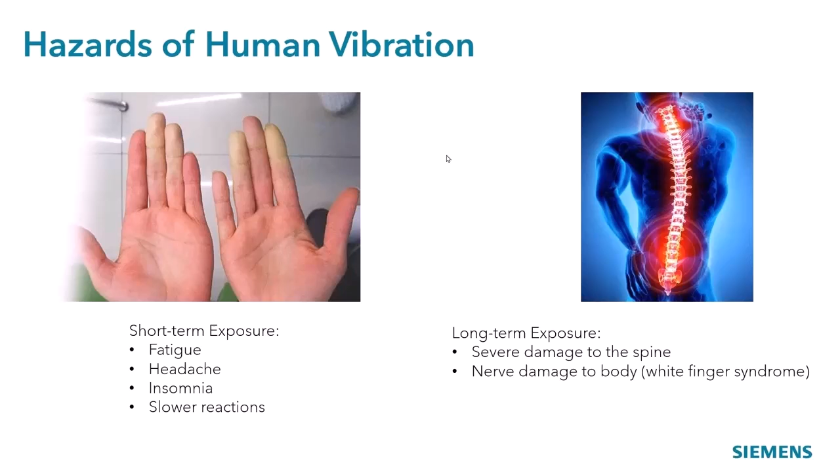So there's two types of human vibration. There's whole body vibration, which I feel like is kind of self-explanatory. It's the vibration that's being imposed on your entire body. And there's a couple orientations that really matter, because the body is sensitive in some directions more so than others. So in the Z direction, the up and down position, the body's actually slightly less sensitive than it is in the X and Y. The X and Y matters a lot more on the person. Later on in the presentation, you'll see that there are more health factors associated with the X and Y directions for whole body vibration.

Strangely enough, the European Union decided that there is not an orientation for the hand and arm that is more important than others, so these are all weighted equally. But it's really important to measure in all three directions because it absolutely can affect you, and it does matter. And we usually look at the summation of all the directions anyways.

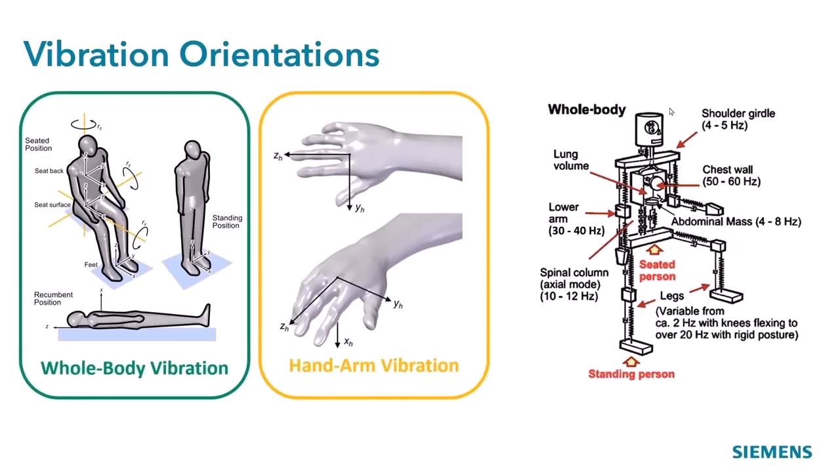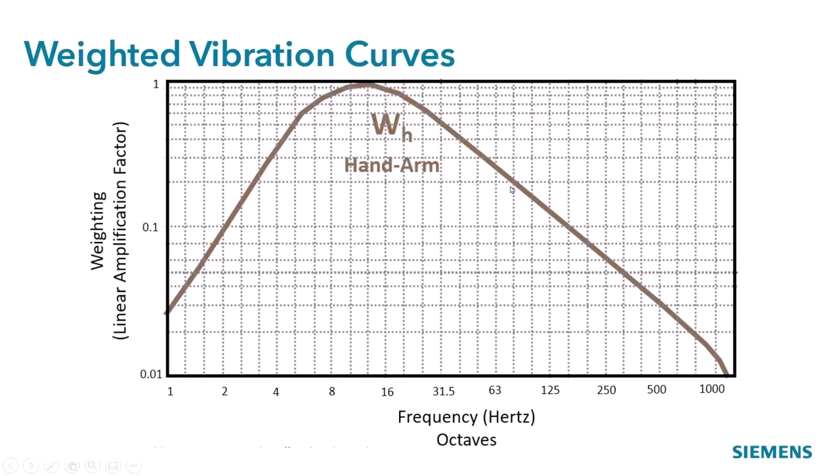So this is what the hand-arm weighting curve looks like. So it's a little different. So there's a bunch of different curves, and luckily nobody needs to memorize these. These are all built into TestLab if you're doing this in TestLab. So that's really nice. But it's important to select the right curve because you will get different results. They are different curves. How they came up with these curves, I'm not entirely sure. I think it was trial and error data because this occurred a long time ago. But make sure you're selecting the correct curve.

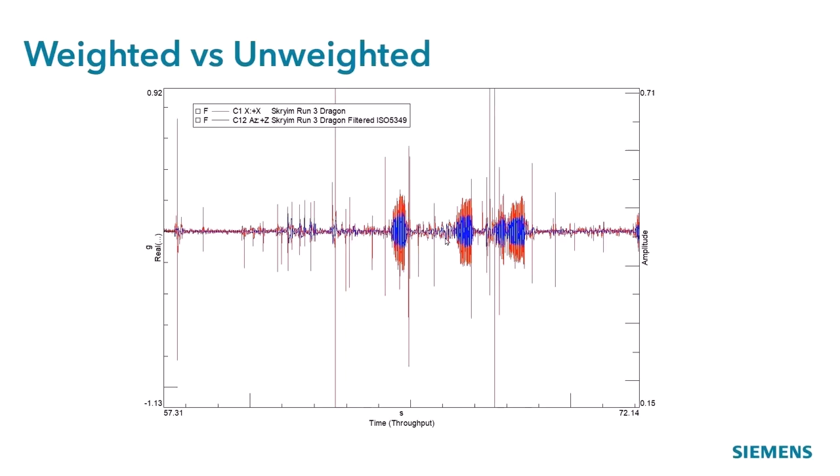The general data when you take it, so I have some data here. I was playing a very popular video game, and I got into a battle with a dragon, and the controller starts shaking a lot. So the red will show the unfiltered data, and then the blue shows the filtered data. So I filtered this using TestLab through the human body vibration filter for hand-arm. And you can see that the amplitude has decreased before the calculations are performed. That's because, once again, the human body will attenuate a lot of that vibration.

The general process for doing vibration data is you have an accelerometer. You usually want to put it somewhere near the test article that you're interested in. So when I did hand-arm vibration on the tool, I would put the accelerometer right where the hand would grip, so we could get an accurate measurement of that. If you're doing whole body vibration, there's special pads where you can put these accelerometers in so that somebody can sit on them. They're like seat pads, if you've ever heard of those.

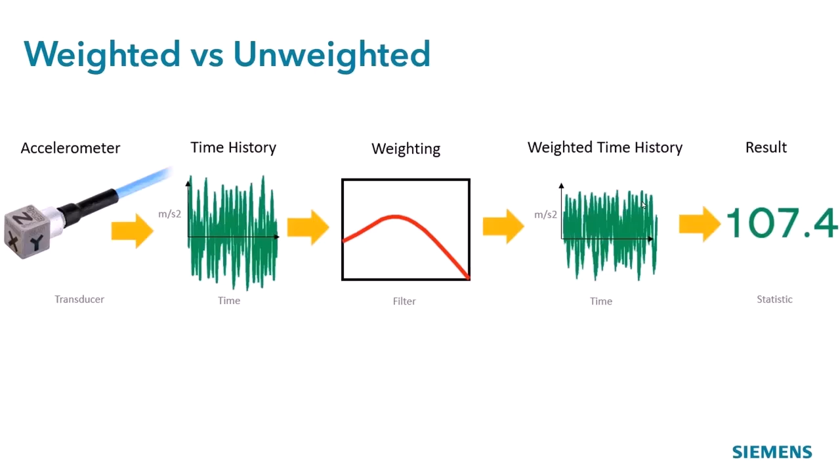So you get an accelerometer, you take a time history, then you weight it with those curves we just showed, and then you get a weighted time history. And then from the weighted time history, there's a ton of different things you can do and a ton of different metrics, and we will get to that. The most basic metric is what we call AW. That's your frequency weighted acceleration. So this is the acceleration data that's been passed through your weighted curves. And you can kind of think of it like an RMS value. That's typically what we look at when we're looking at human vibration. We're trying to get a total value to compare it to something else, usually a singular value.

So if you wanted to get it in all three directions, you could calculate AV, V standing for vector, very scientific, and it's just the square root of the sum of the squares. If you're wondering what these Ks are, that's because earlier I mentioned some directions have different weighting factors than others, because some are more sensitive to the human body. So for whole body vibration, the X and Y direction actually get a factor of 1.4. The Z direction just gets a 1 factor. So it's important when you're calculating these frequency weighted acceleration values, if you want a total, and you're going to see this in TestLab too, this vector sum, we're going to use this a lot to calculate the overall level. This is how you calculate it for all three directions.

There's something called the maximum transient vibration value. This is the maximum value of all three directions of your AW. So you've got an X, Y, and Z direction, and this is the maximum value of that. It's very easy to calculate. And if you're wondering why we calculate AW and MTVV, and there's something called vibration dose value, the reason is AW is really good for stationary, steady state style data. This is data where you're not getting a lot of sudden impulses and peakiness. And if you do start to get impulses and transients and peaks, there's a different metric to use for that.

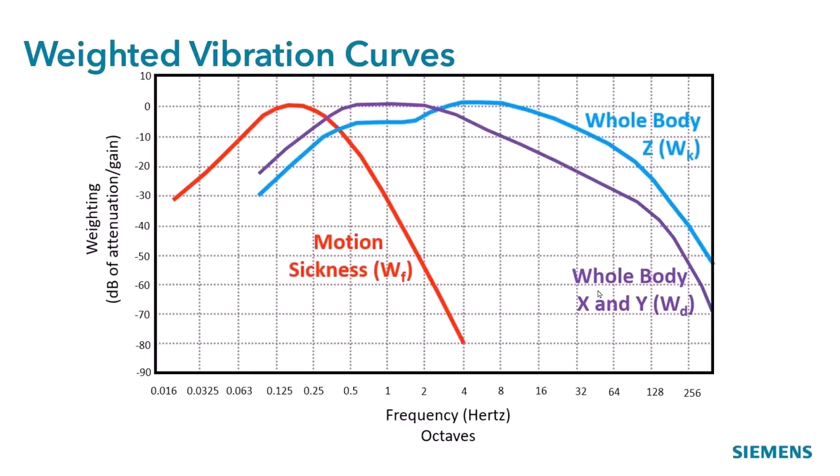Okay, for whole body, you saw that there was a WK, let me go back a little bit. There's a WK and a WD. WK is whole body vibration in the Z direction, and WD is whole body vibration in the X and the Y direction. So there's reasons why we measure them separately. It's mostly because they have differing effects.

For hand-arm, we have something called AH. You might see it as AHV. AHV is the summation in all three directions. This is that curve WH, AH. There's another slide with all the jargon in case you forget. These ones don't have a special call-out between the directions because these are all weighted the same.

There's something called AH equivalent 8, or the 8-hour exposure limit. So this is if you're trying to see if something's safe for somebody to use for an 8-hour workday. So like, let's say you're a tool company and you want to make sure that your jackhammer is safe for somebody to be using for 8 hours a day.

You can type in your acceleration values that you measured over the time that you measured it, and then divide by the amount of seconds in 8 hours, which comes out to roughly like 29,000. So that's one way you can calculate your exposure limit. There are comparative values for what is safe and what is not safe to find in these ISO standards.

Up next is something called crest factor. Crest factor really just tells you the peakiness of your data. It does that by dividing the peak amplitude over the RMS value, specifically the weighted peak amplitude, and I'll show you how you can make that mistake really easily later when we're going through TestLab. But if you don't use the weighted peak amplitude, the comparison number isn't going to make a whole lot of sense.

So the crest factor is a really good way to tell if you're getting a lot of transients in your data. If you're getting a lot of transients in your data, you might want to use this vibration dose value. This vibration dose value is separate from this frequency weighted acceleration. These two values are typically what you want to report, and this is specifically designed for data that is more transient. The equation's a little different mathematically, and it's for a good reason.

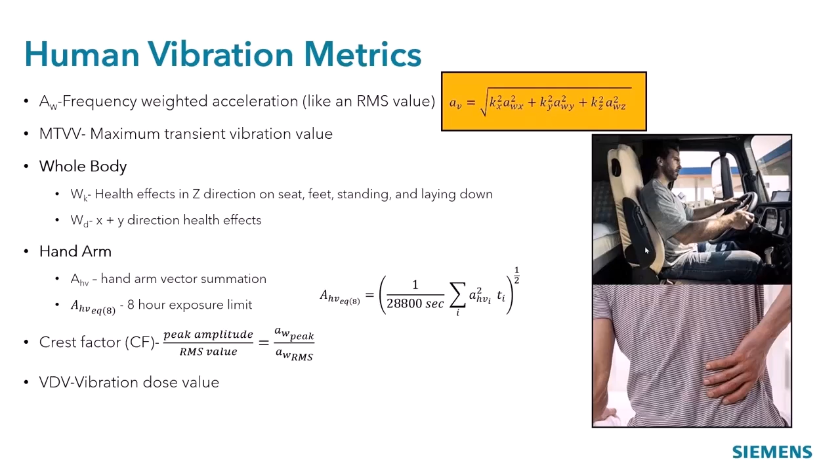So that vibration dose value, once again, this is used if you're doing very impulsive transient data. This is calculated a little differently than the other equations because it's brought to the fourth power. And the reason it's brought to the fourth power is because the fourth power is more sensitive mathematically to spikes in your data. So to amplify those spikes in the data, to make sure that we're staying below important limits while reflecting the important transients in data, you can use this vibration dose value.

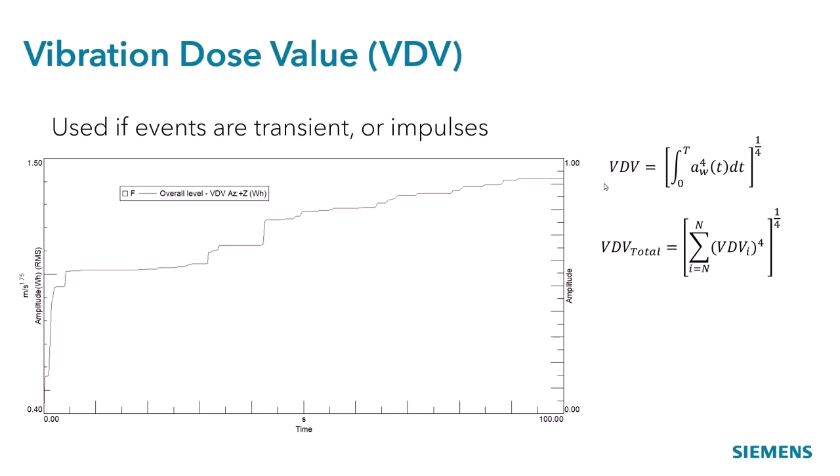It just amplifies it to the fourth power, and then we take the quartic root of that data to get it back to normal. So there's two different ways to calculate it here. These equations are for reference. TestLab calculates these for you. You don't need to worry about it. You can do a total summation in all directions, but typically people will report the VDV of the highest direction.

We talked about when to use different metrics. If your MTVV, that's that transient method, the maximum of your A-weighted acceleration, if that value is greater than 1.5, you're going to want to report this value. Your data is too peaky to be using this stationary RMS value. If your data is 1.75 times the A-weighted times your time, you're going to want to report this VDV total value. That crest factor is also used as a measure of peakiness. You can use that too.

So if your crest factor is less than 9, you can use AW. And if it's greater than 9, you're going to want to use that vibration dose value. So this is a measure of peakiness. If it's below that, you can use basically your stationary. If it's above that, you're going to want to use that metric that's more sensitive to those transient impulses.

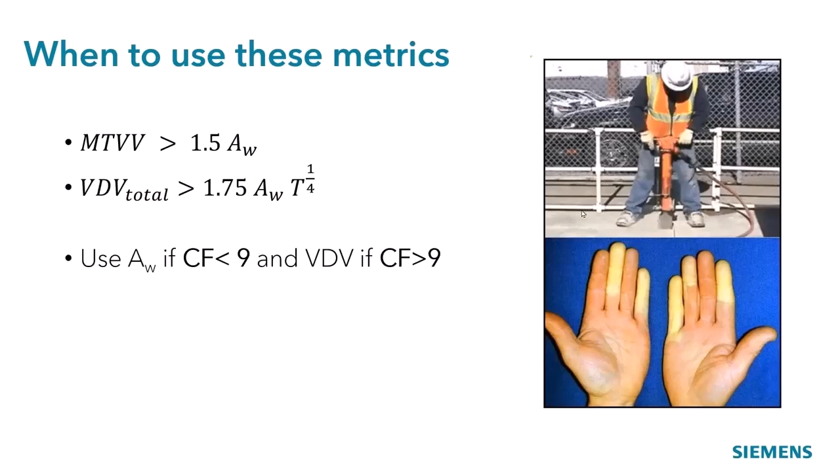So WK, WD, there's a bunch of them we didn't even talk about. WJ, which has to do with your head position. WC, which has to do with your back position. But mostly for this presentation, we're going to be focusing on WH, that hand-arm.

So there's two standards that are used. It's important to remember these just because when you're in TestLab, you will have the option of picking either one to filter to. And if you filter the wrong one, as we showed earlier, those curves are different, you will get the wrong answer. So there's ISO 2631. This is the one for human vibration. Once again, WK and WD.

I mentioned that we're trying to get singular values because we want something to compare to. So when the EU made these standards, they have some take action limits and some immediately stop limits. So for whole body vibration, if you take the vector sum of your A-weighted data, if you report the VDV value or the AW value, if it's above 0.5 meters per second squared, you need to reduce the vibration. Or if it's above 1.15 meters per second squared, you should stop.

For vibration dose values, this is closer to 9.1 meters per second to the 1.75 power and 21 meters per second to the 1.75 power. If you're doing hand-arm, your reduced vibration action is 2.5 meters per second squared. And that's actually pretty low. So most of the power tools that are designed for people who work in the industry, most of the time the handle is actually decoupled from the rotating mechanism in an attempt to reduce the vibration. The stop action exposure limit for this is 5 meters per second squared.

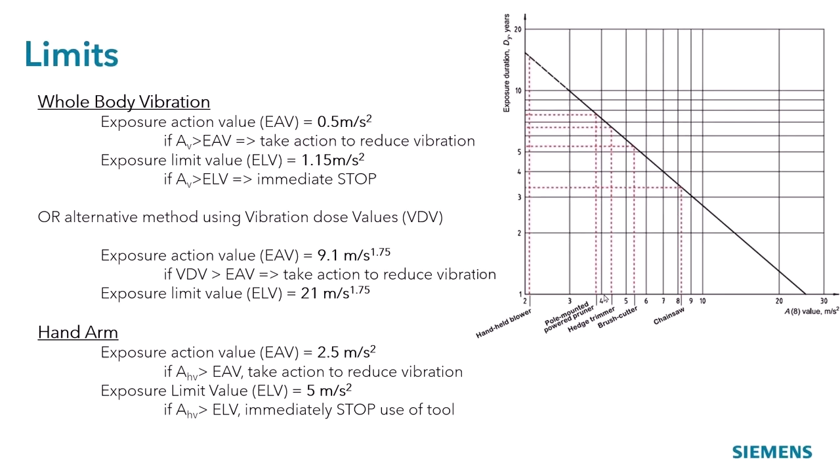So for whole body vibration, the general process is to measure the data, and then in TestLab, these two steps are done together where it filters it into octave bands and then it weights those octave bands because there's specific weighting criteria for each frequency. And then you'll have it in 3 directions. You'll have your A-weighted in X, your A-weighted in Y, and your A-weighted in Z.

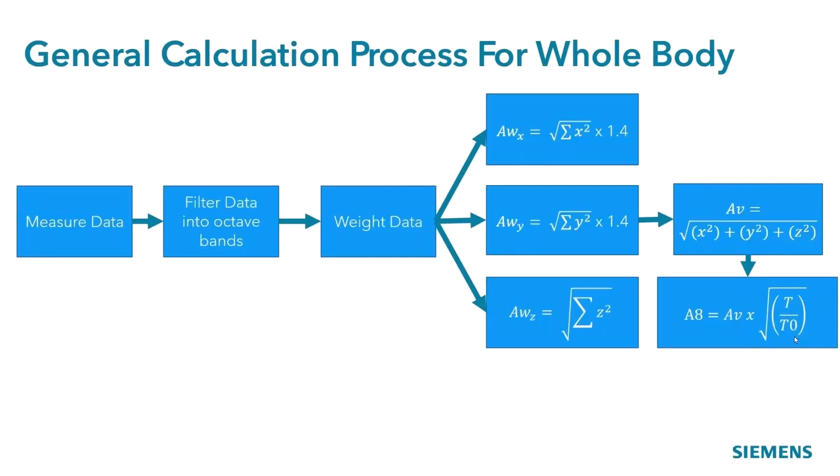You can do the sum of the squares. This 1.4 is that health factor that gets multiplied. And then you can get a total vector, this AV vector. If you want to do an 8-hour exposure, you can apply the AV vector and multiply it by your T, which is the time you took the data for, over T naught, which is the seconds in an 8-hour day.

For hand-arm, the process looks very similar. We're going to weight the data. The data will come out in 3 directions, and then we're going to do a vector sum to get the overall level. And this overall level is what we're going to be able to use to compare back to those EU standards.

The math behind most of what we're doing is actually really, really simple. It's the weighting and the filtering that gets more complicated. But luckily, I will not be weighting and filtering by hand today. I don't know anybody who likes to program Butterworth filters by hand, but that's not me. So we'll be doing that in TestLab.

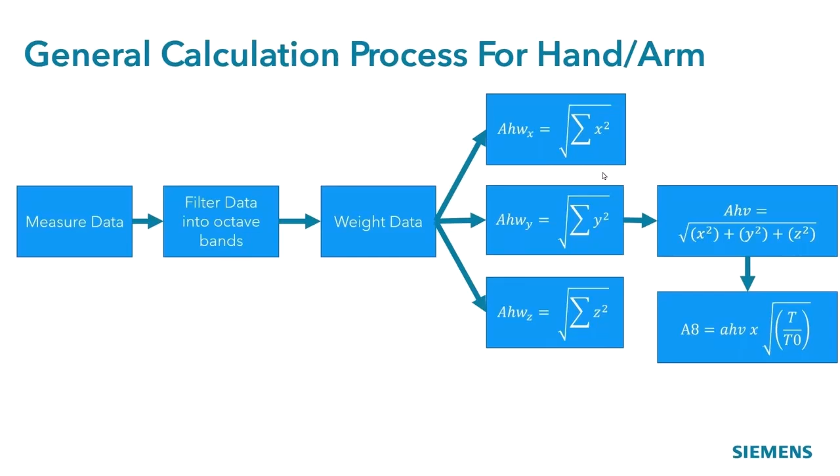So for my data, my setup was very simple. I had a little SCADAS XS. I did this data at home. I connected my accelerometer. It's in a very specific position. This position is because when you're playing video games, if you've never played video games before, there's these little rumble motors inside the controller.

They give haptic feedback. So I battled in this video game 2 different bosses. I battled a troll and a dragon, and as I'm battling this troll and dragon, this controller is starting to shake and go crazy to let me know that the dragon has landed, or I've landed a hit, or I'm being hurt.

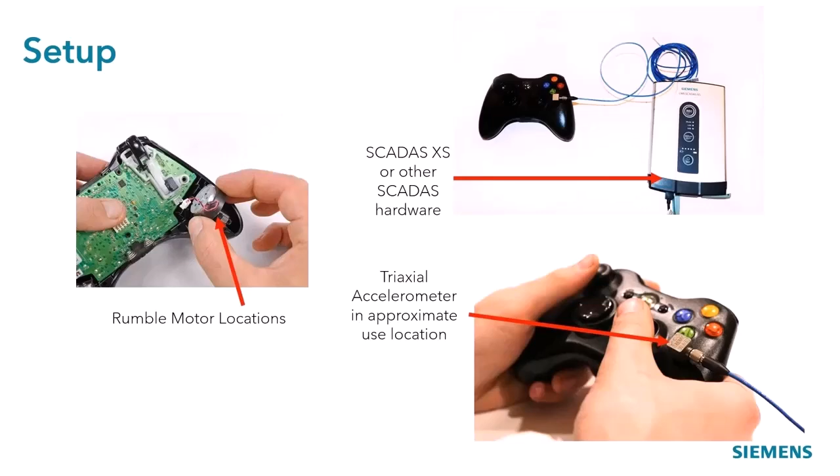So in video games, this can be pretty useful to players. And I just wanted to see exactly what the acceleration values were if I was playing this 8 hours a day. So here's my 2 battles, and I'll show you the data too so that you guys get an idea. I've got a troll battle and I've got a dragon battle.

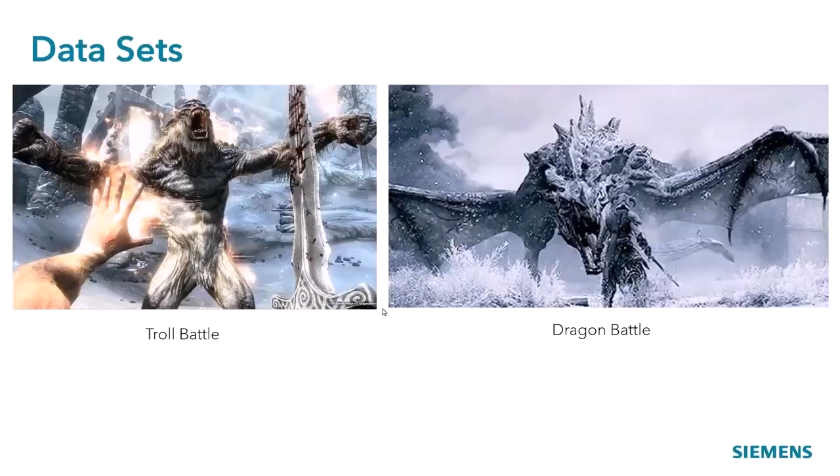And if you know the popular video game, that's great. It's a fun one. And they're also taken at different lengths: this data is taken for 30 seconds, and this data is taken for about 100 seconds, because that's about how long I lasted in each battle. So now I'm going to pop it over to Test Lab.

Okay, so I've gotten some measured data in Test Lab. This is the throughput data in the X, Y, and Z direction. So I can zoom in a little bit. All I've done here is plot my data, just so you guys can see that at some points I'm hitting a troll, or at some points I'm getting hit by a troll, and then my dragon data.

And unfiltered, the accelerometer registered up to 31 meters per second squared. So this controller was shaking quite a bit during this battle for sure. The trolls actually only got up to a maximum of about 15 meters per second squared in any given direction. So that's what my data looks like.

I'm going to post-process. We'll do post-processing 1. I'm going to post-process this Skyrim Dragon 3. So what I'm going to do is right-click and hit Add to the Input Basket. If you're new to Test Lab and you don't know what the Input Basket is, that's this thing right here. It's a little folder that lets you separate out all your data.

So I had a bunch of data in my measured, but I only want to process the Dragon data, so I'm going to add that to the Input Basket. I'm going to go to Time Data Selection. I've already got these typed in here, but I'll re-type them in just so that people can get an idea. I'm going to add in my data. I've got my X, Y, and Z channels.

Then the most important thing you need to do is you need to have the correct add-ins on. So for this one, at minimum, you will need human body vibration. If you do not have this turned on, those filters will not pop up in Test Lab, and you will be very confused wondering where the equation went. So this is important to turn on.

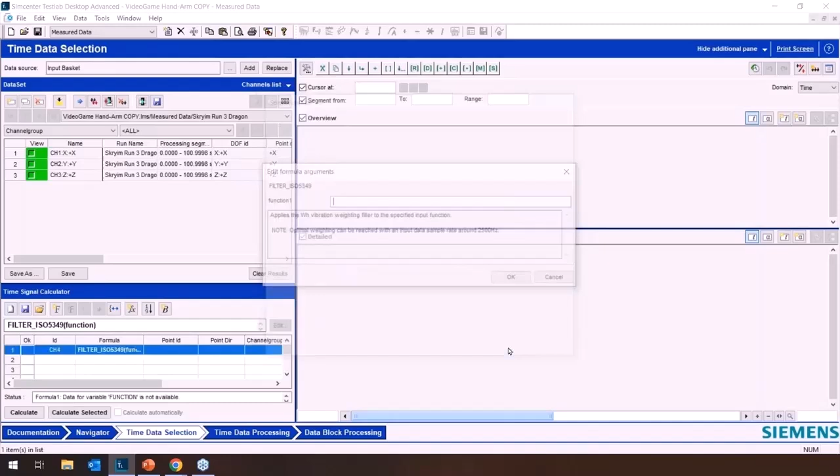My first channel, channel 1. And then I want to apply this to all 3 channels. You can hand type it in, or, if I'm careful about it, you can drag it down. Sometimes it doesn't like to work for me. There we go. So now it's applying to channels 1, 2, and 3. So my X channel is channel 1. I'll call this A hand X, A hand Y, A hand Z.

And now I can calculate it. So I've got my 3 calculated areas, and this is good. We're pretty much halfway there. There's something really cool you can do right now too. If you want to calculate that MTVV and those crest factors, you don't have to go back to the navigator. You can calculate them right here to see what your next step needs to be. If you go over here to this hide additional pane and go to single value statistics, it'll pull this screen right here.

Now I can add some functions. So I want to add in the max, because that's that MTVV value, and I want to add in crest factor. If I hit calculate, I now have them for all the channels. So remember earlier I said if you're using the unweighted, your crest factor is going to be really, really high. This is 63, that's way above 9, and that's not accurate. This isn't what our standards are built to.

So if you look at your crest factor and it seems incredibly high, take a second and look at if you're using the weighted data, which is down here, or the unweighted data. So my weighted data, I've got really peaky data in all three directions actually. I've got 8, 11, and 10. So hypothetically speaking, I would use the vibration dose value. So I'm going to show you how to calculate both of them.

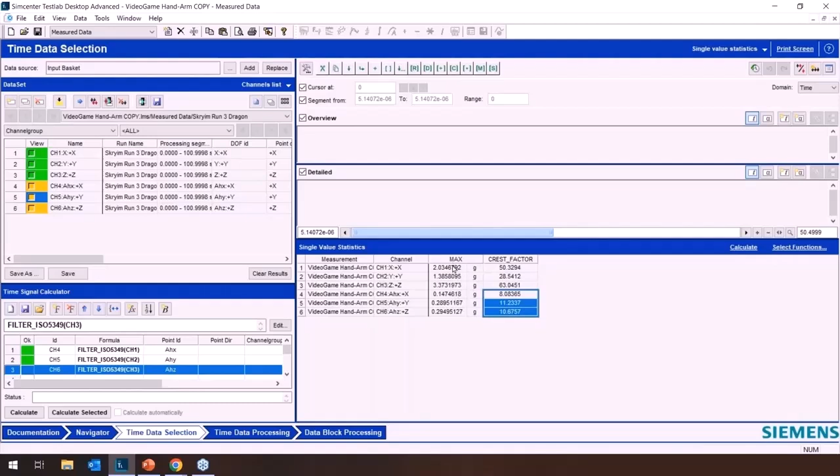And then for the max, I can find out if my max transient value is higher using that little equation that was earlier in the slides. So obviously I'm going to keep going. After this has been calculated, you don't need to save it necessarily. You can go into time data processing.

So I've got these 3 channels, and the weighted channels are the ones we want to calculate. So we want to make sure that those are selected. If you select these, you're going to get some weird data because this is unweighted. So my AHX, my AHY, and my AHZ. I'm going to go to channel processing. You're probably used to seeing this screen, this is what it defaults to.

If you go to derived fixed sampling, you can add a new channel with a function called vector sum. And vector sum, just like back in the PowerPoint, what TestLab's going to be doing is applying this equation to your data. So we have our weighted data, and it's going to be applying this equation. So I'm going to do a vector sum.

The important thing here is if you're looking at this side, it's a little misleading. It might look like the X is channel 2 and the Y is channel 4. To double check that you're getting the right channels, go to the source data dropdown, and we want channels 4, 5, and 6 because those are our weighted channels. So that looks good to me. I'm going to keep going.

If I go to section, there's a bunch of different things I can add. So I'll delete these real quick and show you how you add them in. But I want to go to level calculation. Usually this defaults somewhere over here. I want to add the vibration dose value to calculate that. I will add the RMS equivalent sound. And let's do a running RMS. I'll just calculate all these. You can calculate all of them or none of them. It's up to you. But it's something to note.

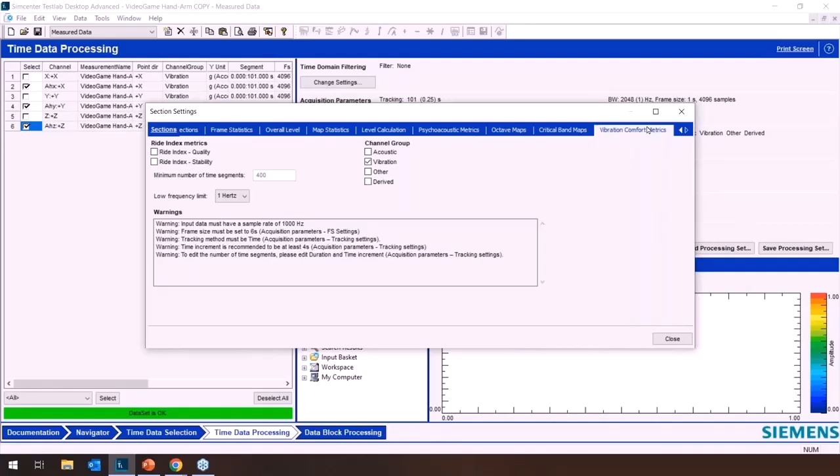Another thing, this isn't part of this presentation, but there's also these vibration comfort metrics that can be selected. This is probably a different webinar, but I will point it out just because it's a part of human vibration. And then the other thing I want to have selected is overall level. The overall level is going to be calculating this portion.

So the vector sum is doing this portion, but the overall level is going to be doing the sum of the squares. It won't be doing the 1.4 unless you manually type that in. That's something to note for whole body vibration, but if you're doing hand-arm vibration, you should have no issues. There's a place later where I can show you exactly how to do that if you wanted to do it for whole body. So this all looks good.

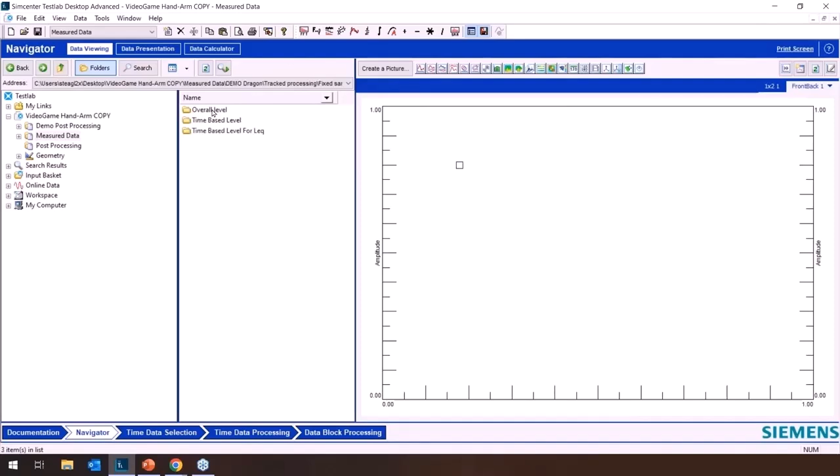If you hit this little icon up here, it'll open everything that's in that folder. So I've got my overall levels in all 3 directions if I want to look at those, and then I've got my overall level vector sum. Now this might not look super nice. That's because this is for the entire signal, but the value we want to report is an RMS value.

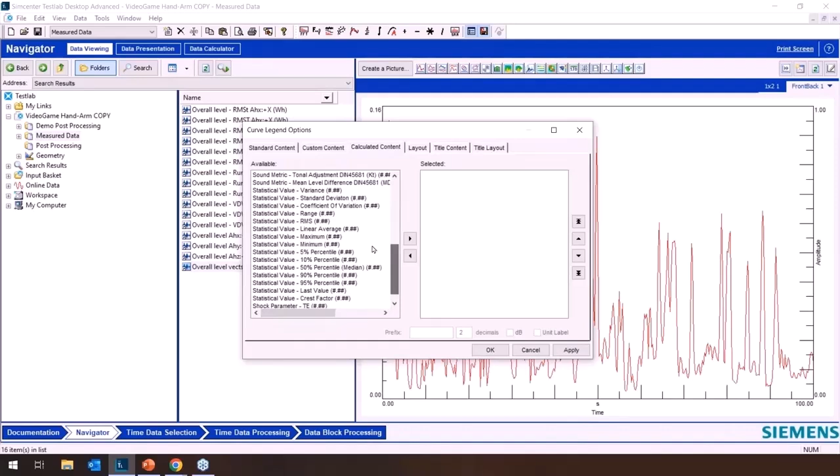So if I go to options, there's something here called calculated content. If you've never seen this before, all I did was right click on the cursor menu and go to options, calculated content, scroll down, and I want to grab an RMS value. I'm going to label that RMS so I don't forget, because I'm sure I will. And I have about 0.04 Gs. Our standards are in meters per second squared, so if I right click on this, I can change the unit.

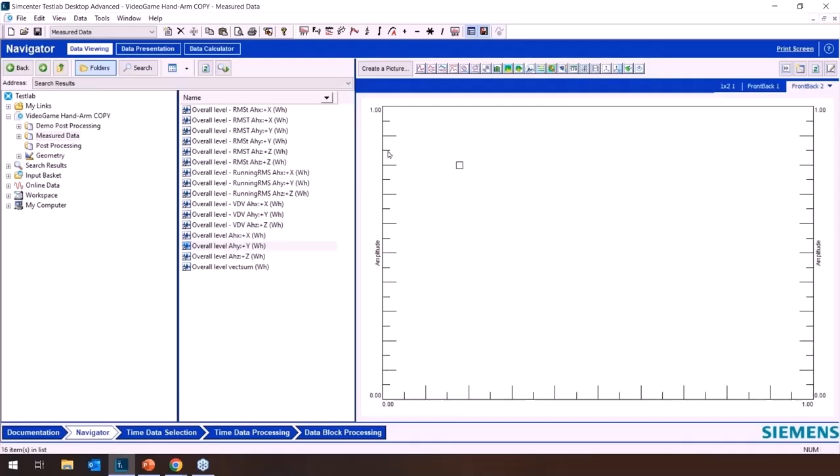Now I'm at 0.4 meters per second. So that's good. This is really low, which is good. That's good to know. If I wanted to look at the overall levels in every direction, I can do that too. They're not as useful, I don't think. I can also do that vibration dose value for all three directions and see which one is highest. So in this case, the Y direction is the highest.

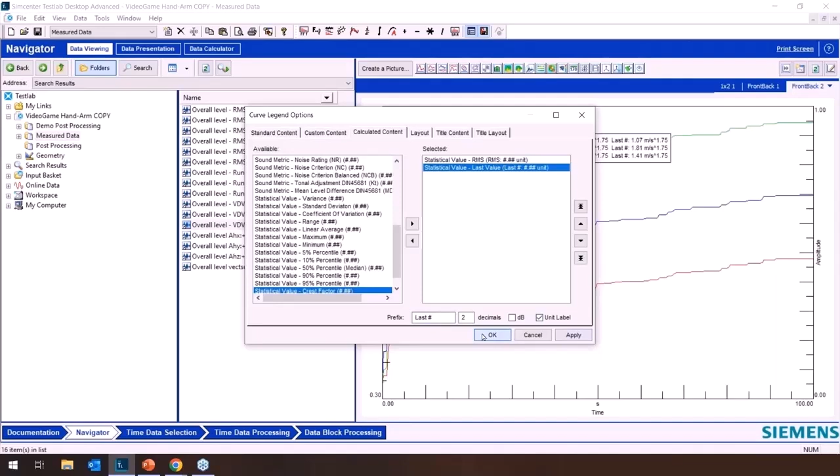Let's take a look at this. This is like a running RMS, so you can do this a couple different ways. You can add the RMS value, or you can add the... there it is. So our last value in the running RMS is 1.41 meters per second, and the total overall RMS of this is 1.22. So this would be another value that you could report.

So if my data was really peaky, which it is, in this instance I might want to report the VDV value, and the VDV value is still below that 2.5 meters per second. I don't need to do any exposure for my data. There's another way you can calculate it. This is using data block processing. If you've never seen this before, this is really nice. You can actually manually go in and type in these equations.

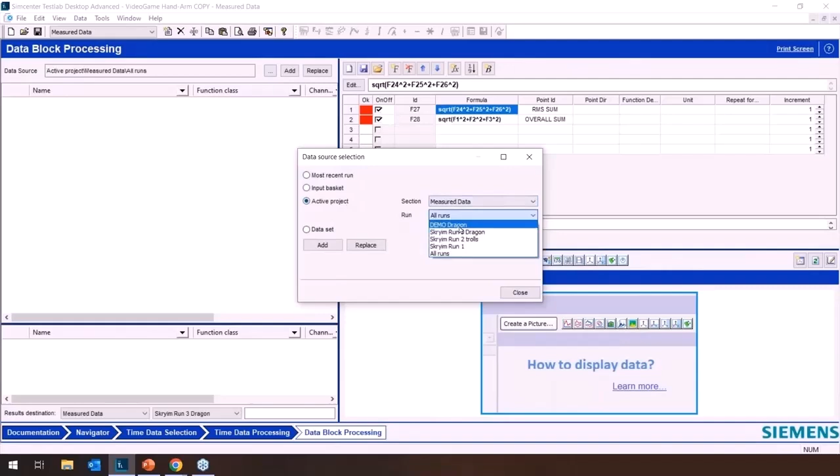So I saved my data under measured data. There's different sections. I've saved it under measured, and I've saved it under demo dragon. I go to block processing. I can go to measured demo dragon and hit add. Got all these great channels here, and now I can manually do the vector sum. So if I wanted the overall level, the RMS sum, these are the weighted channels. This is what that vector sum did in time data processing over here, this vector sum here.

So if I go to data block processing, I can manually type in F1, F2, F3 and take the square root of the sum of the squares, and I'm going to label that overall sum. I can also do an RMS sum. An RMS sum is the sum of the running RMS values, sort of like the vibration dose values I just showed you. These should turn out to be exactly the same. So this RMST, if you remember when I was in time data processing, I went to section and the level calculation I selected was running RMS. That's what these data block processing channels are from. So I can do a summation of those as well.

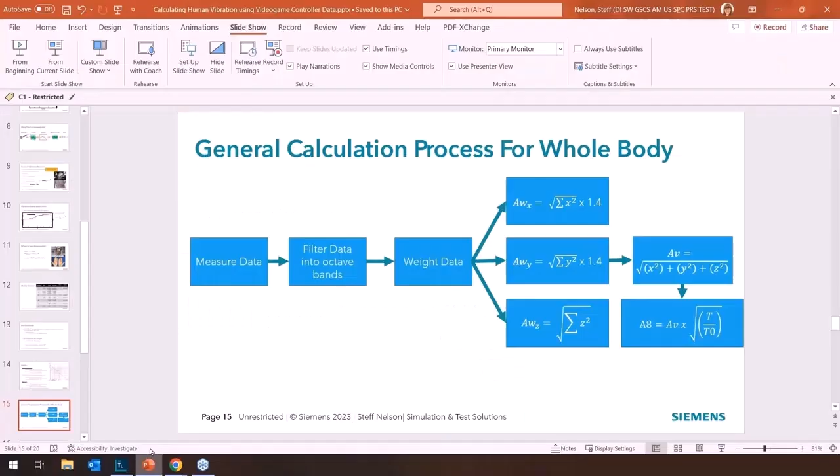I can also, if I'm doing whole body vibration, this is where I can do square root of F1 squared times 1.4, otherwise we're going to get some weird numbers, plus F2 times 1.4. Sorry, my typing is off today. Plus F3. And these values came from those WD and WK, the health effects.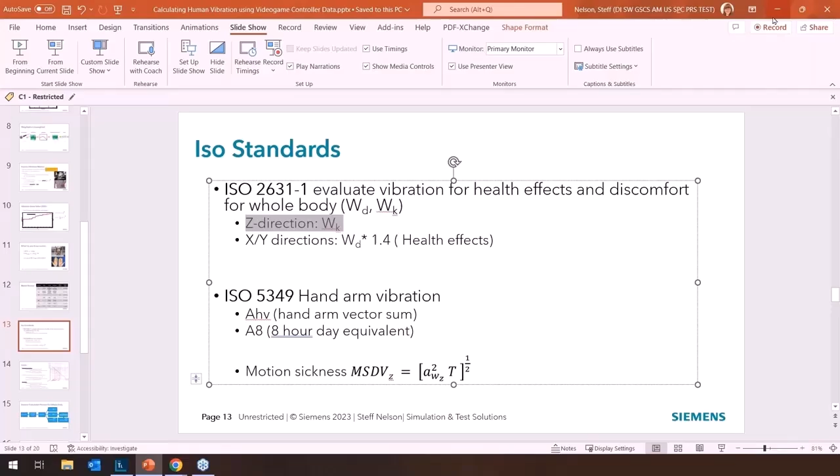So in the X and Y direction, I multiplied by 1.4, but there is nothing in the Z direction. So you could calculate that here, and I could call this whole body. This isn't going to make sense. This data wasn't taken for whole body, but we can calculate it anyways. So calculate.

Another thing you can do: we're doing the offline processing, so this is what happens if you've already taken the data. There is a way to automatically calculate all of this if you're doing processing during the measurements. So if you're physically taking measurements, there's a way to automatically calculate all of this so you don't have to do everything offline. You can also hit calculate automatically if you're doing a ton of runs. That'll also bring the data back into Navigator. So go here.

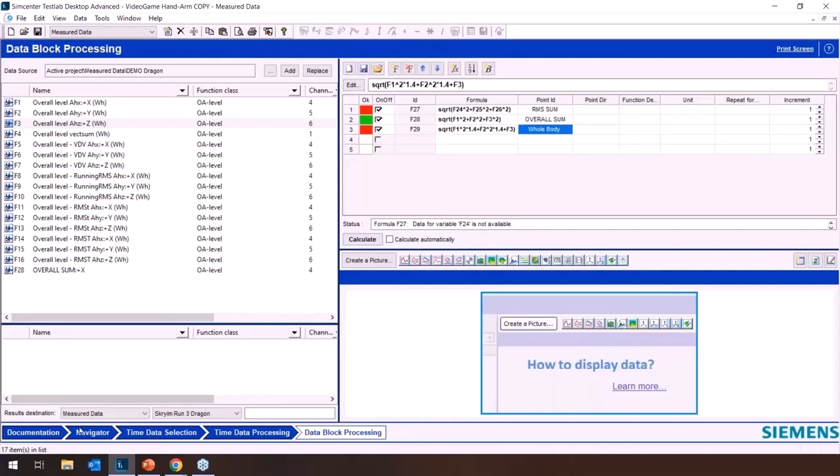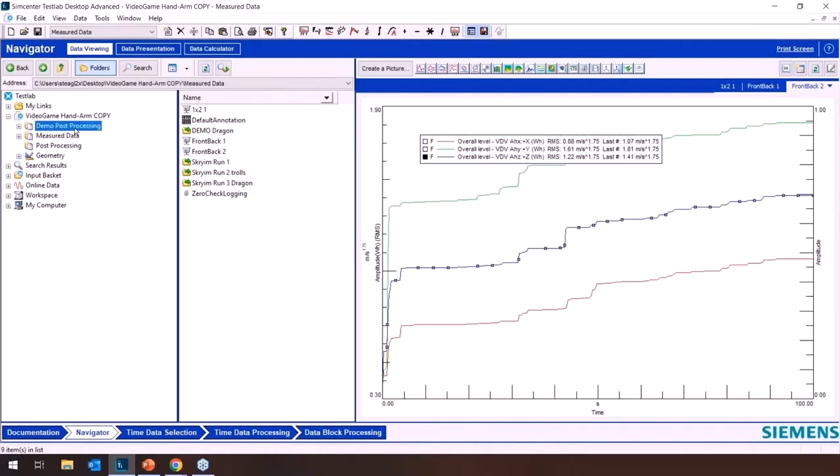And I've got most of this calculated, so in the interest of not showing you how to make graphs over and over again, I'm going to pull up some of that data. So this is the unfiltered data. This is the filtered data. This is the crest factor comparison between the dragon and the trolls. So I've post-processed both data now.

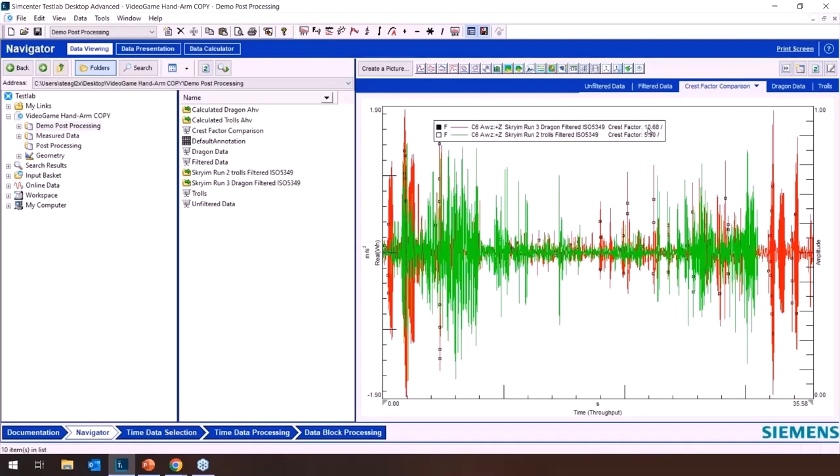And the way that I got crest factor is the same way I got those other metrics. I right-clicked, went to options, and calculated content. There's a statistical value called crest factor. I've labeled it and I have applied it. So for my trolls, my crest factor is really low, which is interesting. I would probably not use the VDV value for the trolls data, but for the dragon, it was pretty high, so I would report my VDV value for the dragon.

Dragon data, I've got a couple things going on here. The overall sum and the vector level sum, these should match up exactly. They're the exact same calculation. Overall sum is the one I did manually in block processing. And the vector sum is the one that we selected when we were in the time data processing. So you can choose either one, whichever one ends up being more effective for you. So that data overlap is exactly the same. And my RMS value is 0.4 meters per second squared.

This RMS sum, this is a sum of that running RMS. So you'll notice that it starts kind of high and then it slowly levels off to the same value. This is an RMS over time. So at this point in time, it's an RMS of all these values. And at this point in time, it's an RMS of all the previous values. And it keeps going. So for the RMS sum, since it's a running RMS, what you want to do is take the last value. So I've labeled that here last value. And you'll notice that it's exactly the same as these RMS values.

So that's another way, depending on how you would like to calculate it. There's a ton of ways to calculate it in TestLab. That's another way you can do it if you're running into issues or you want to make sure that all your data is lining up.

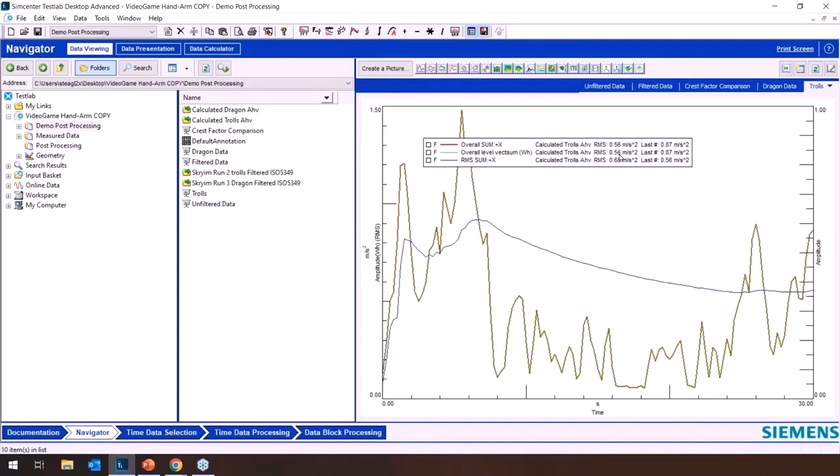Trolls data looks a little different. So here I've got my overall sum and my vector sum. Once again, these should be the same. They're calculated pretty much the same. And my RMS value is actually higher than the dragon's. So the dragon had more peaks, more transient events, but my trolls level overall was a higher amount of vibration. And the last value, this blue is the running RMS sum. The last value matches up with these two values. And if you ever get confused and you decide later that you don't want some of this calculated content, you can get rid of it.

So another thing I will show while I'm here is if I right click, it's really easy to lose track of all this data. One thing you can do is you can add in different things to the curve legend here. You can add in the type of data that was taken. You can add in the direction of data. So if I only wanted to look at the X direction, or if I didn't label my directions and I wanted to make sure these were in the X direction, I can go to TestLab. It does not default to TestLab, but the origin should be set to TestLab. I can go to block, and I can start selecting how I'd like to label my data. So maybe I want to see point direction. So for these two, it labeled both of these in the X direction.

If I want to name it, this is really useful. I have a bunch of curves up here. You don't know which runs they're from, if they're from multiple runs. I can go back to run and go down to name and add the name in.

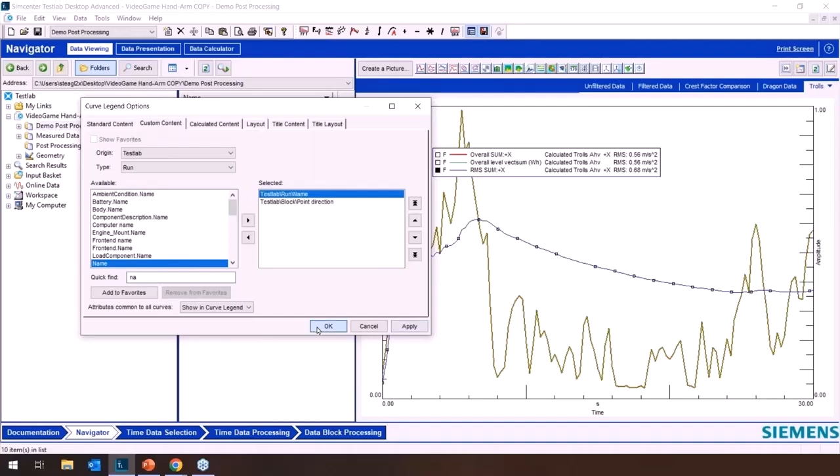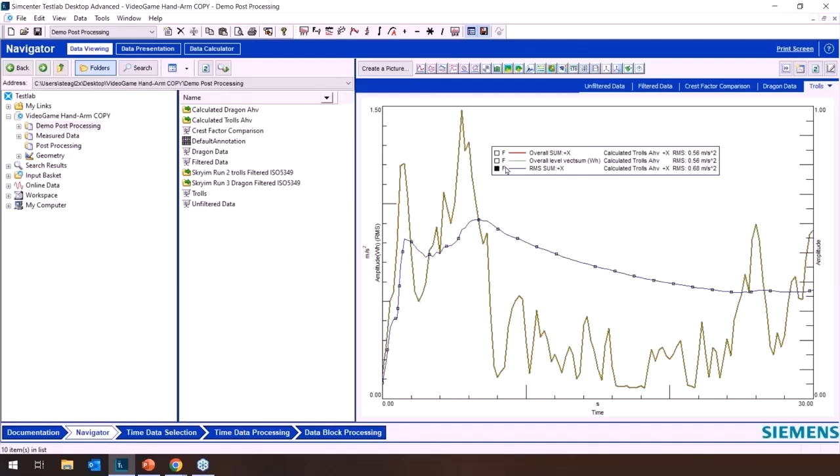So overall, the processing steps in TestLab are very simple, but it can be kind of tricky to find everything and lose track of what you're doing. I know that I have a whole folder full of runs when I did this data because I was constantly losing track of what was the overall sum, what was the RMS level. So as long as you keep a good naming strategy, this can be really simple.

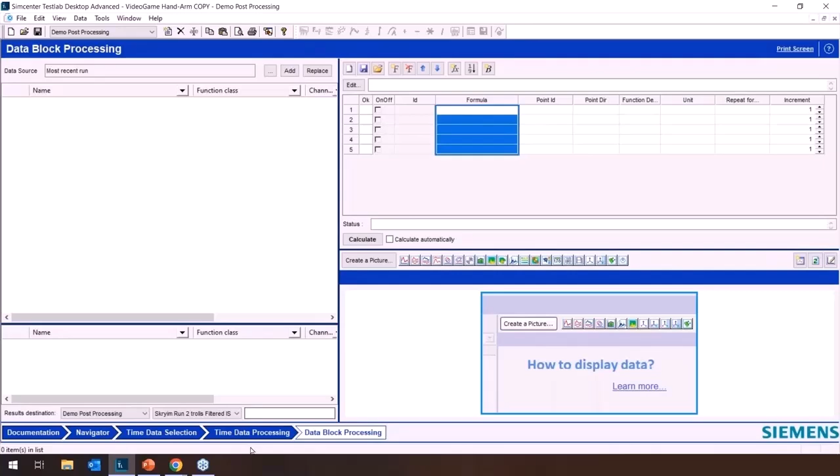But all you need to do is go in, filter the data in the time data selection, and then you can either use time data processing or data block processing. I like data block processing only because it gives you a lot more freedom after you've gone to time data selection to do different calculations. But time data processing will also give you that VDV and the running RMS. So it just depends on the type of calculations you're interested in.